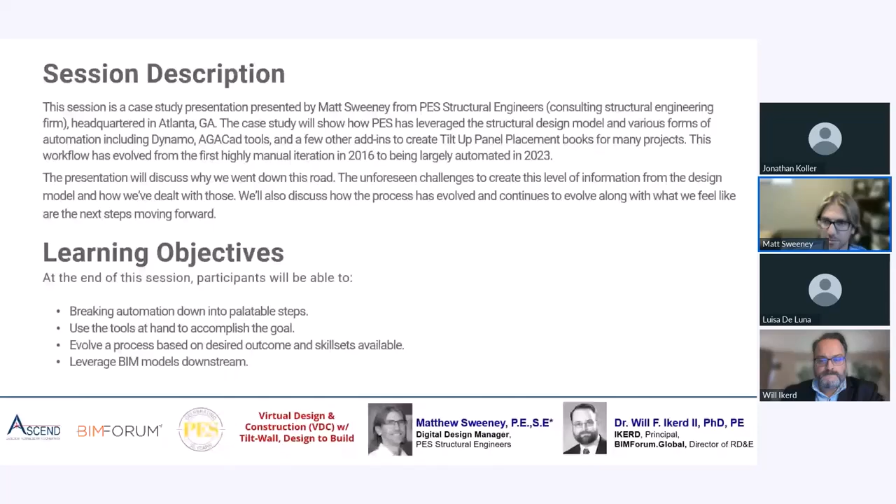So a quick introduction to who I am. I've been in the AEC industry about 20 years now, 15 with PES in 2 different stints, 7 the first time, 8 this time. It's a little picture of me back in 2005, a little bit younger there. Started as a traditional structural engineer, went through all the typical process into project management, the licensed engineer.

Now I've kind of reinvented myself as the overall office technology guy, dabble with some tool creation. But the BIM and technology related direction kind of goes through me. I also work with our IT group on our cybersecurity, CRM tools, all of it. And like Will mentioned, I'm a big outdoor adventure family guy. So PES, we are about 55 people strong.

Consulting, structural engineering, headquartered in the Southeast. We've been around about 35 years. We have 2 offices and some remote folks. Second group's up in Hartford, Connecticut. We work on all kinds of different projects, a lot of warehouse or light industrial, but everything up to and including this larger residential tower on the right.

As a company, we really like to focus on our culture, not just having fun, though we do like that part, but working hard, winning as a team, driving for improvement and owning it. It's also, I think, worth mentioning, we don't have many dedicated BIM staff. Our engineers do a lot of their own work, their own Revit work. We do have a few that get into some things in more detail, but most of it's been engineers.

We've been a relatively forward-thinking company. We started with BIM back in 2006, and looked into and started bringing in automation tools around 2015 or so.

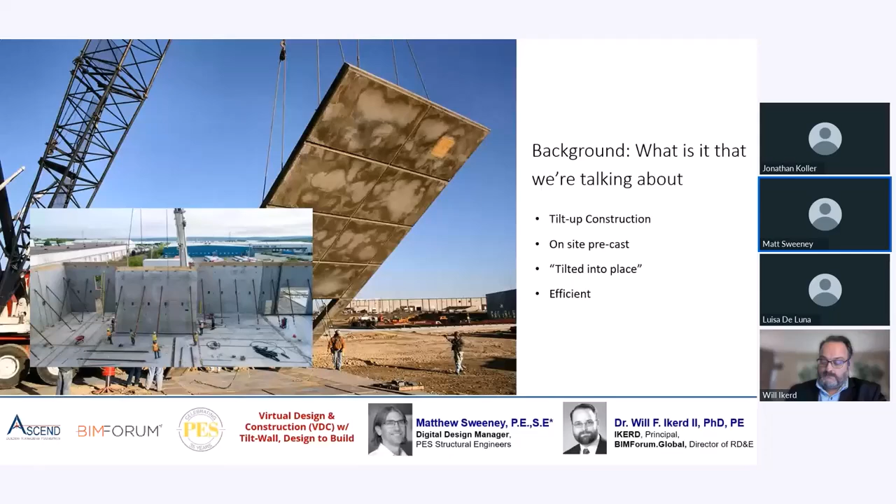So in tilt-up construction, one of the main submittals that we need early on is the panel book or panel placement drawing. It's a shop drawing document used by the contractor to physically lay out the formwork and embeds and anything that goes into the panel for the most part, including size and shape, size and locations of reveals, depressions, openings, embed types and their locations specific on that panel. Basically anything you would need to physically lay this thing out, short of rebar and lifting information. Those 2 pieces tend to come from a separate specialty contractor and are typically in their own packages or documents.

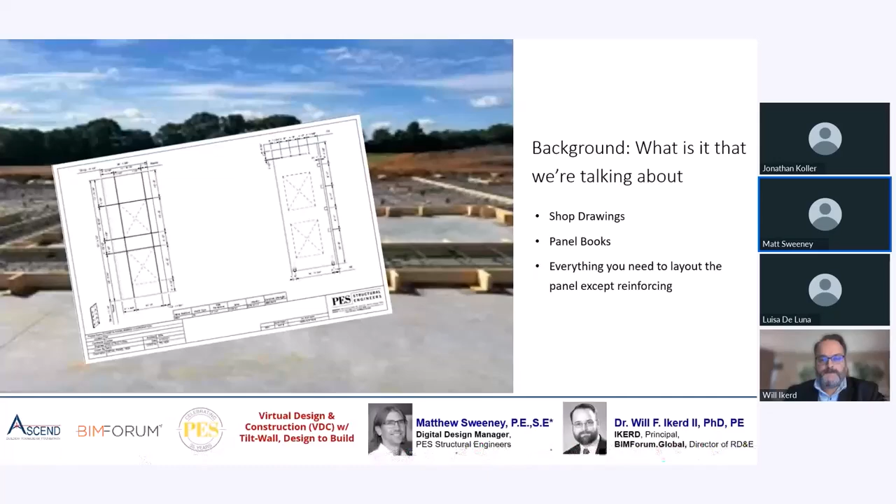Also, getting into schedule timing, we can start development a lot earlier on this stuff because we are ready and familiar with how the schedule is going, what areas can be worked on, what areas should be held, those types of things. And it also helps us forge stronger relationships with some of our clients. We're now providing more service for the project and getting more interaction with them.

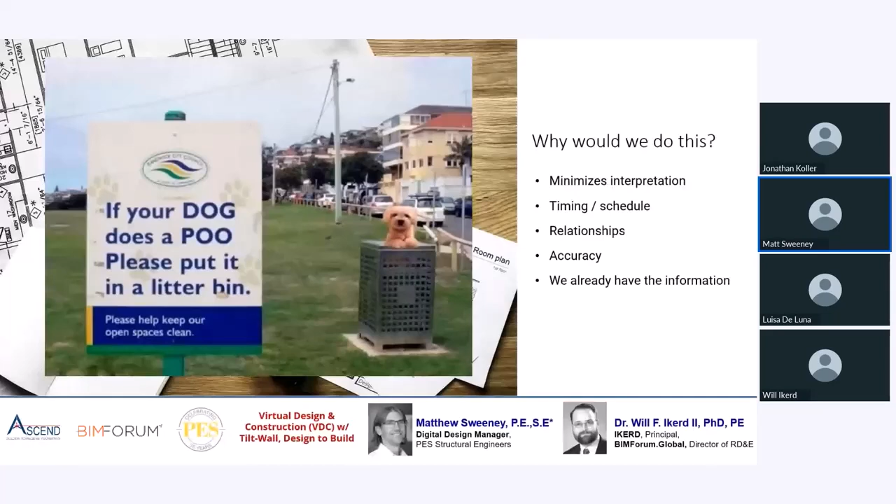So the why seemed to make sense, but how did we actually get going in this, or stick our foot into this door? To be honest, it started with a strong relationship with one of our developers. We had some projects where there were a lot of issues around embed placement and layout. And they sort of looked to us to say, hey guys, what can we do to help? How can we make this better?

So like I said, we're always kind of looking to increase our scope. We've been fairly entrepreneurial as a company over the years. So we had some discussions and decided that we would look at trying to create some of these things on our own.

We didn't go into this with blinders thinking that we were just going to hit go from our models. We understood we make design models. They are not quite the level of development you would need for a shop drawing. So we knew we had some challenges. We didn't have reveals or some of the panel features, some of the joints, those things might have been missing, but we may have overestimated a little bit how well the BIM process was actually working at the time.

Architects maybe not fully modeling all of their information. How was communication going to work? And just the level of coordination you need to get into this detail was just a little bit more and different than design work. But we had some thoughts.

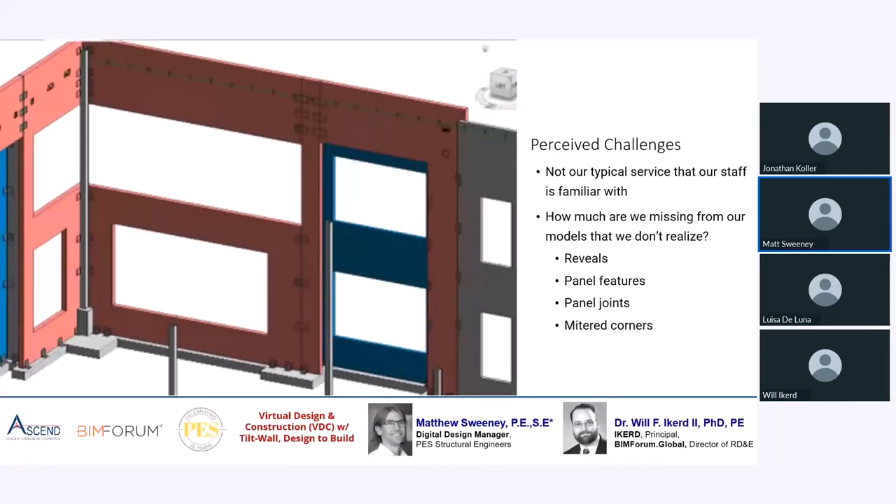So some of the things that we originally thought, and this is kind of where we started, is that we thought maybe we would save ourselves some headache by minimizing sheet count. I'll touch on that a little bit. We knew we were really going to have to detail processes out. This is not our bread and butter work, something we do all the time. We were going to have pretty detailed processes. We were going to make sure we leverage some of the construction tools in our platform that we don't normally get into.

We had a pretty robust intern program at the time. We knew there was some repetitive work, so we could leverage that a little bit. And then automation was something that from the beginning we knew we needed to get into and bring into this process. But when we started this in 2016, we were just learning some of the automation tools. We had some very basic coding knowledge, but we felt pretty good about it.

So the first attempt didn't quite go as planned. It wasn't really a lot of fun. It was complex. Some of the places that we thought were going to be easy were not. There's a lot of view making, a lot of sheet making, dimensioning. Just by the time we got through it, we realized we needed to make a change, and then had to go back and redo a lot of things. We didn't do so well from a profitability standpoint on that first one, and we certainly weren't going to get a lot of volunteers from the office to work on this process if we didn't make some adjustments.

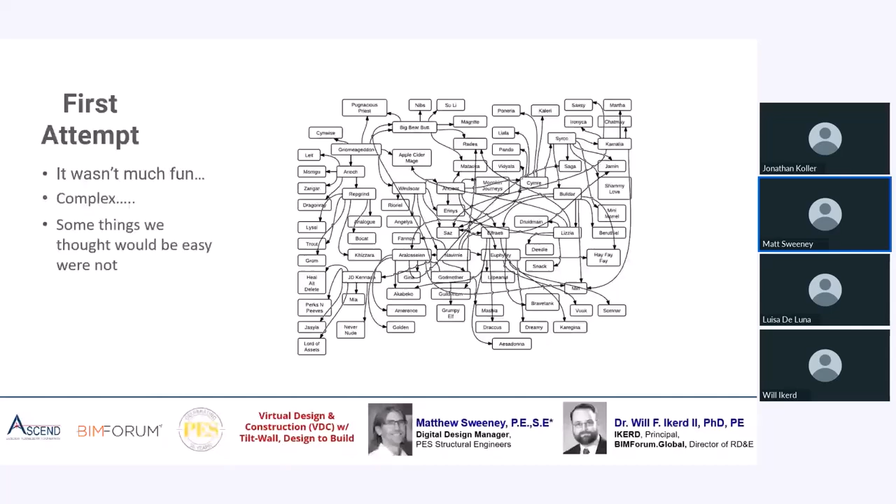So we started looking at refining this, and we tried to be methodical about this. We broke down the steps, made some tables with solutions, put it into 2 big buckets, and then asked ourselves some questions like, what things were the most achievable? Where would we save the most time? What was the most egregious to the actual end users? What steps had application in our typical workflows and typical processes? Not all these answers aligned with each other and made it obvious, but they gave us a good framework to get moving with.

So our lowest hanging fruit honestly seemed to be we absolutely had to improve the LOD, or level of development. Shop drawings, like I said, are quite a bit more. Our design models are closer to LOD 200, where shop drawings are going to be in the 350 range. So we needed to get some detail into our model.

The automation of getting embed plates seemed like it was a good place to start. We have walls, we have intersecting joists. Most of your primary embeds are going to happen at some sort of intersection of a wall and another member, be it a joist or a joist girder or a roof of some sort. So we turned to Dynamo, intersected the face of the wall with the joist, got ourselves a point and dropped in a family at that location. For the most part, it was pretty straightforward.

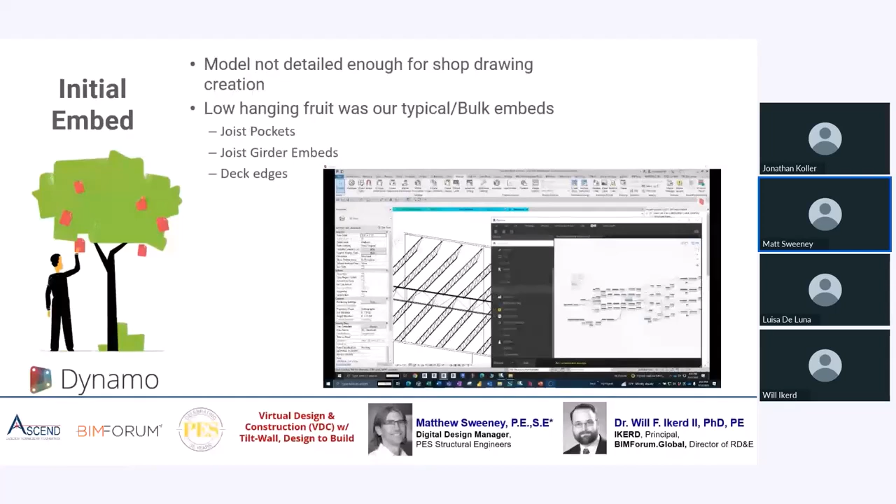So we went from there into panel joints, and these are often overlooked. Design models don't show some of the construction tolerance, the gaps between the panels or the gap at the bottom for the grout bed. There's a couple ways you can consider doing this. You could physically shorten the walls, but that had implications on how the footings worked, and we wanted to be able to go from center line to center line, so that wasn't quite what we wanted to do.

But we went the approach of just putting in full depth reveals at each end of the wall to create that gap. We assumed and thought this was going to be really straightforward, and we felt really good about our automation abilities. We were wrong. Dynamo didn't quite play as nicely as we wanted it to. It would only place one of them.

But what we did learn is that we found some macros that access the API a little bit differently and allowed us to get most of them modeled relatively well and relatively close to what we needed. We did need a few manual changes here and there, but it was well over that 80% rule. So again, a big step forward in getting this done without all the manual work. Maybe not perfect, but again, we're trying to take steps forward in the process.

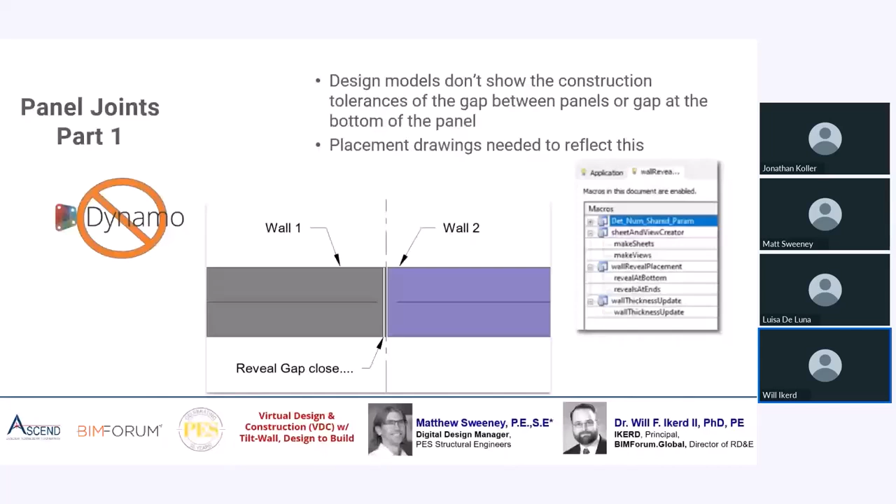And Matt, I had one question in this area. We've seen a lot of examples in precast, but there you have a much more controlled manufacturing environment when you get to the casting beds. With tilt wall, you're on site. I guess it is assumed we've got a lot of manual layout in the field. On most of your examples, are they basically working off paper in the field on these embed layouts when they're setting them in the formwork?

Yes, they are almost always working off of paper, and I'll mention that in the next couple slides. But they get to where they want one piece of paper for each panel, and they can basically set that out at the base of the panel, and then everyone can reference that. And that's how they prefer it at the moment. So it's interesting how that works, though. Definitely.

Moving into the next piece of the model here, though, is the reveals. As structural engineers, we don't get into this that often. We don't model these. Once we know the depth, we can design our panels around that depth. We look at them to make sure nothing crazy is going on, but we don't have to deal with the specifics of them. For the shop drawings, they need to be accurate. They need to be dimensioned, tagged and all there. So we initially just went with the idea that we have the architectural link. We can turn that on, dimension them, and go from there.

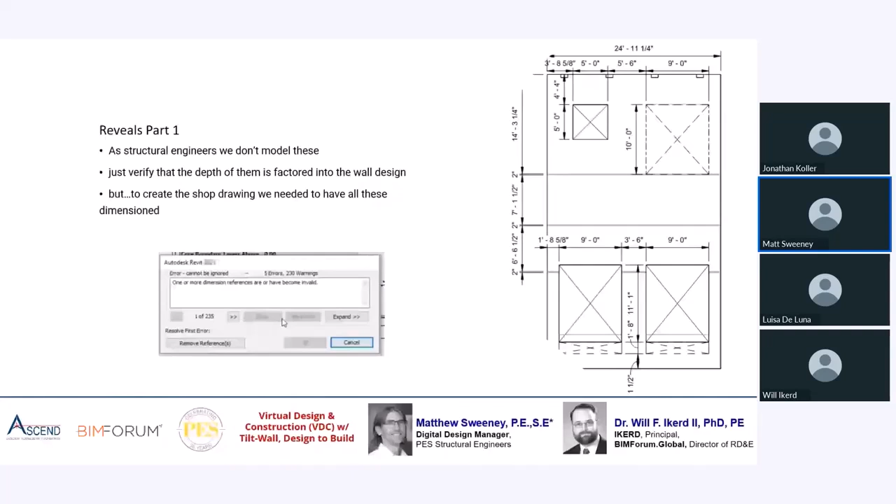On the way, we realized and found out that wall orientation had a large impact on any sort of automation you wanted to do. And most of our team is pretty good about modeling very consistently, but sometimes you're modeling or copying from architectural walls, or you're copying walls around, and this just gets missed. So we made a few different graphs to help us get everything in line.

And we really stuck to the keep it simple approach with this one. We actually made 4 different graphs so that it was very approachable for anybody in the company to use. You didn't have to wonder what was happening or do anything weird. You could just pick the walls you wanted to face one direction. We put that into Dynamo Player, so it was very simple for everyone to use.

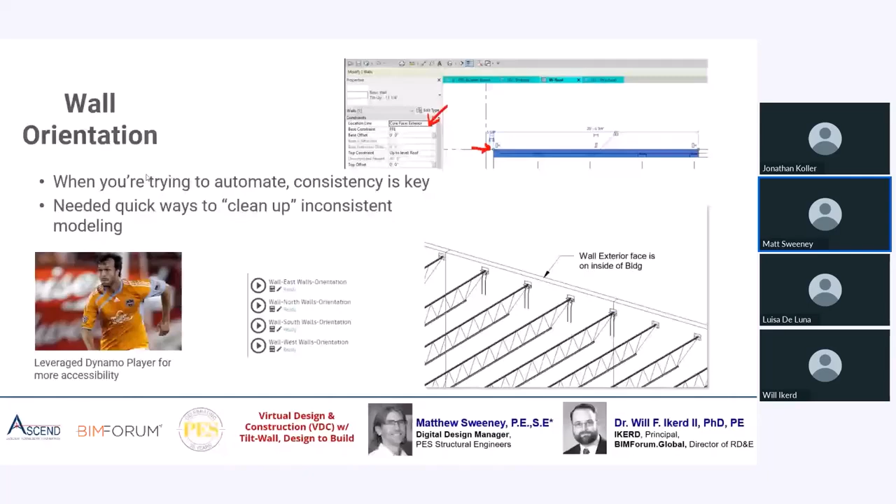So once you get the model where you want, you know, you think you've made good progress, you get into the views and the sheets and the documentation, and that's where the fun part really begins. And this is really where your automation can save the day. The first one we did was largely manual, and when I say largely manual, we really had almost no automation. So we did most of this by hand.

And like I said, we tried this idea that less sheets was going to be less work. That's incorrect. Less sheets actually becomes more work because you've got to try and squeeze them into these little blocks. And it's not really what they want in the field anyway. They really want one sheet per panel because it just makes it cleaner for them. They can basically staple it to the formwork almost, and then everyone has that sheet to reference. They don't want this grouping of panels.

But we got into the view creation. Each panel has two different views associated with it, a reveal view and an embed view to keep your dimensions somewhat clean. The first time this was creating an elevation, copying it around the building, using an add-in to duplicate that, then renaming and view templates. It was very manual, very haphazard, to be honest.

Nothing was identical. Trying to automate anything really became a challenge because it was so bespoke. And then you had to get into creating sheets. So at the end of the day, this got really, really cumbersome. Some of these buildings have over 190 panels. So we really had to get into doing something with this.

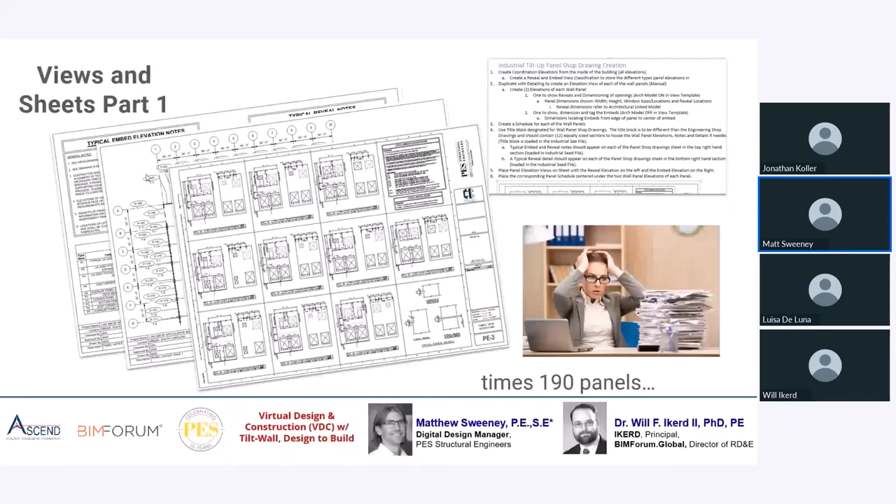We transitioned this into more Dynamo to create sheets, create views for each panel. That created each one of our views. It also made sure that they were created with intentionality. They were consistent. They all had the same gap on the end of each wall. They all had the same view depth. Everything was the same, which meant we could easily make edits along the way. We knew what we were dealing with.

Cropping issues, we had filters created from that same setup that filtered out the panels next to it. There were still some challenges, but this was pretty big for us. The bigger task, though, was making the sheets. We actually turned to a couple pretty basic add-ins for this, using ArchSmarter to make different sheets from an Excel sheet that basically puts all of the views on the sheet, and then we could turn back to it to align the views. So now we had all of our sheets and views created with a few different steps.

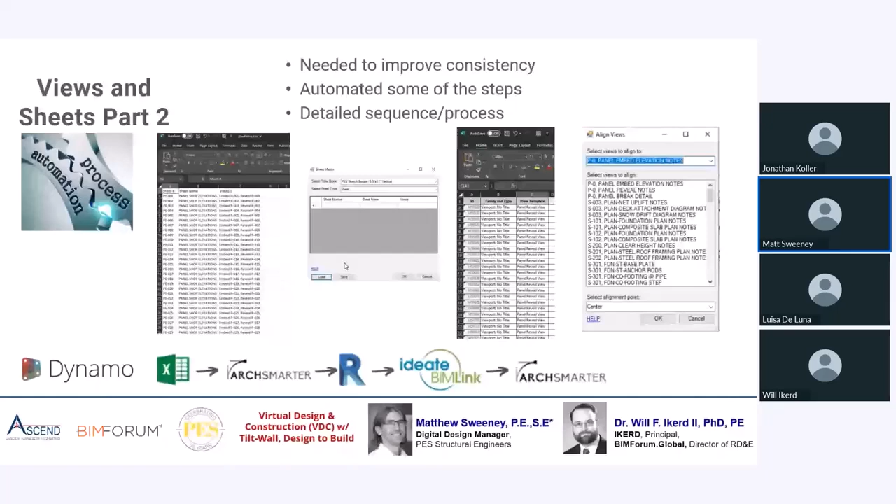The tools and steps are adding up, but it's a scalable process at this point, as opposed to just how much clicking can you do. Now we're starting to get into this scalable process. We still needed to add our schedules to the sheets and create the schedules. So we stuck with our keeping it simple. We went and made a few more different graphs to put those together, put them on sheets, and keeping things as their own step in their own graph made them easy to troubleshoot. It made it easier to teach people what was going on, because you really did have a step-by-step process.

And again, these steps are adding up, but it is kind of a scalable process. And with that engaged team, it was almost starting to become fun, and there were reasons and discussions, like it was almost like a game to try and find out what next step we could do to make it cleaner and easier for us.

We were making really good progress with this, but then we got into dimensioning and tagging, and there's a lot of dimensions and tags. They really have to be accurate. If you do this manually, you bring in some opportunity for human error with picking the wrong reference plane or just skipping and missing things. So we really knew and wanted to make some automation happen.

We were starting to see more of this come in. Things were starting to pick up, and we needed to make some progress quickly.

We'd been in this for a few years now. Developing those tools on our own became a challenge. With Revit changes, API changes, which means you had to update the Dynamo tools, the macros. Trying to keep up with that on our own was tough.

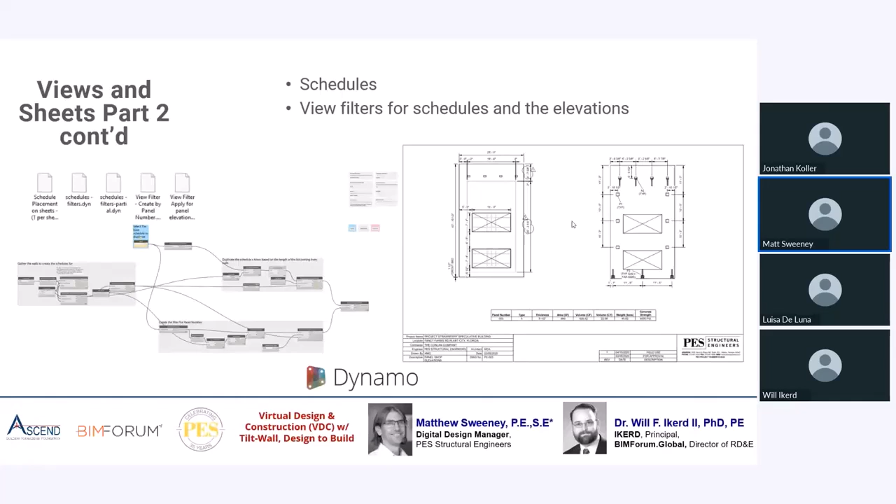We came across a tool from AGACad that looked like there were some promises actually geared towards precast. It was a little different than what we were doing. As Will mentioned earlier, it's a lot more controlled, but the end goal was actually quite similar. We did a number of demonstrations and trials and testing, and found that we could use it as a platform to get to where we wanted to go.

And definitely not a commercial here. This is not an easy button, but it was a platform that gave us the ability to kind of leverage what we had done already and take it further.

Even though our main focus with this tool was dimensioning, we realized there were a lot of opportunities to improve our modeling. So we actually jumped on that first and streamlined how we were placing our embeds and our panel joints and gaps and everything along those lines, even the reveals. There were tools for rule-based placement of any sort of face-based families, so we had a lot of options to make this go quicker.

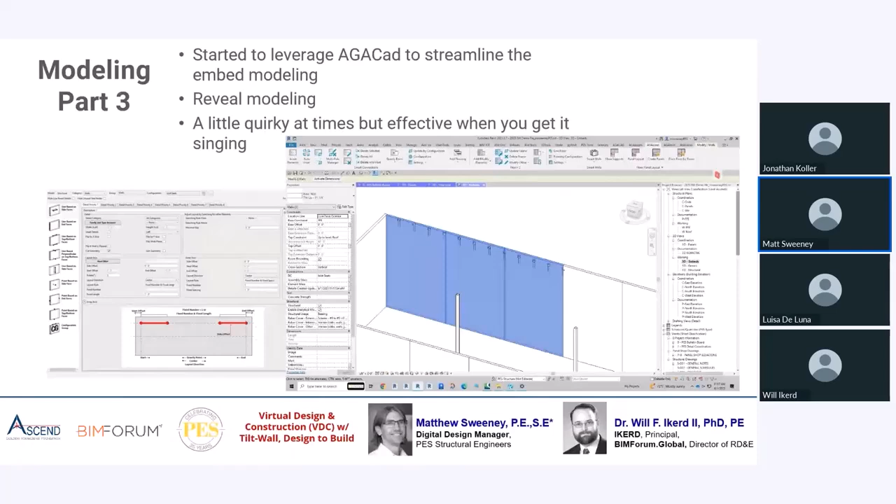So the biggest game changer here was really getting into the documentation piece of this, and that's kind of what led us down this road, was getting all of these pieces of view creation, sheet layout, dimensioning and tagging, kind of bringing it all into one large template in one tool, albeit it's a very complex tool with a lot of different pieces. And at the end of the day, it really is leveraging some of the built-in pieces to Revit, but it really makes everything a lot more approachable.

We had investigated a lot of the out-of-the-box tools and didn't have a lot of success getting them to where we wanted them, just with too much user input, and this really kind of gave us that platform to put it all together.

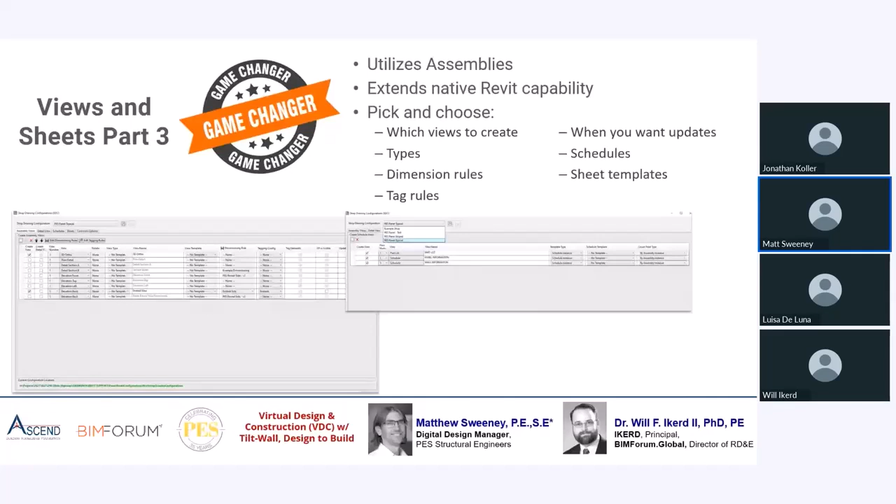So we have the ability now to put in templates for our view creation and sheet creation, so everything gets to where it wants to be. But ultimately, the dimensioning and tagging are really the key parts to this, and there's a lot of tools around getting these set up the way you want. The biggest key is that now you've defined what family you want and what reference planes in the family you want to tag, and you get that exactly correct every single time. It works really cleanly at that point.

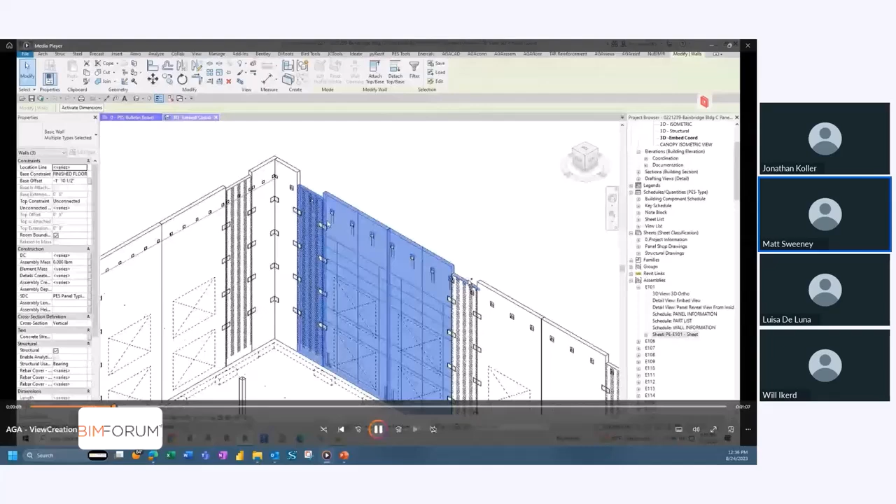Just to demonstrate that quickly here, if you select a few different panels, these all have everything they need in them. This is real similar to what we saw with putting in the embeds. You pick on that, and you can actually go look at your templates if you want, which views you're creating, which schedules you want to create. As we look at this, I see you've got the panel selected, and then you pull this dialog up, and it gives you a lot of granularity.

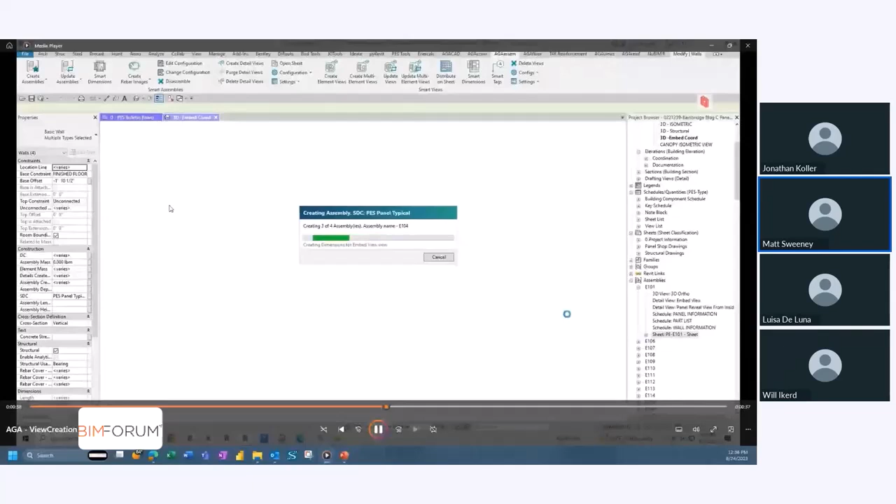And this is the third-party plugin you're using? Correct. Okay. And then we get those sheets, and now I've made sheets, and you can see all my dimensions are in here. At the scale we work at for these, there is still some cleanup. This is getting better with every update, but we will go in and clean a lot of this up so that it's a lot more legible.

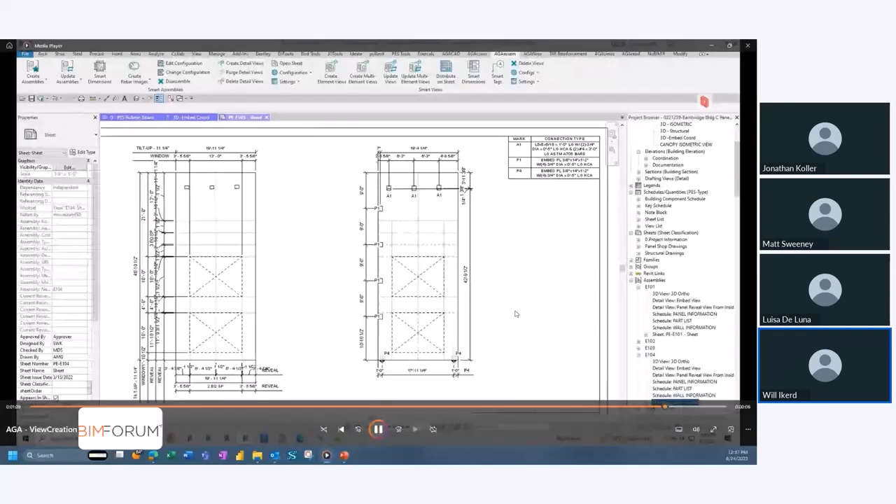But you can see that it becomes a very repeatable thing, and this is where it really kind of changes things up at that point. And so we're getting the front and the back, and these are essentially, I guess, an ANSI B 11 by 17 sheet. Correct. Okay. Front, back, 11 by 17.

Every sheet, every wall is on its own sheet, with a list of which embeds are which, exactly where they are from the edge of the panel. They're both from the outside or inside out, because they're going to form these face down, so that when you pick up that sheet in the field, you're looking and standing at the base of the panel, looking out over the formwork.

So one thing that comes to mind is nesting and quantification of your embeds. I see you've got your marks and your bill of materials in the upper right. Were you able to automate a lot of your embeds for quantity takeoff? At this point, you can actually double check this against your steel submittals to get your exact number of embeds, because you've got all of those quantified here. So you take those numbers and match them up against your steel submittal, which is nice to verify and double check.

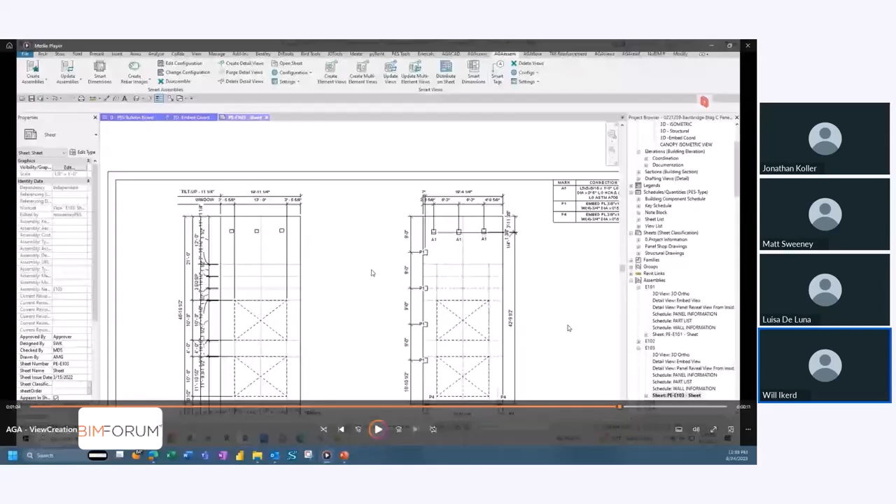One thing that comes up, Matt, is you've got your bar joists, and those are going to be from your joist manufacturer, and they have a steel detailer. Then you may very well, on the opposing orthogonal directions, have some structural steel beams that connect in. If you're not using a trussed girder type system, you might have some traditional structural steel for columns and maybe a few girders, and that's another steel detailer working under the structural steel fabricator. When we're looking at those, perhaps you might have canopies outside the building that could be miscellaneous metals, so you might have yet a third detailer working under a fabricator. So even when we say steel on one job, you may have three steel detailers from three separate firms.

In theory, one could be, I'm not plugging any of it, but one could be in Tekla, one could be in SDS2, and another could be Advance Steel. Each of those have to have an embed to do their part. Has anyone ever really asked you for a DXF or a 3D CAD export of just your embeds as a reference? Or are any of the GCs you're working with looking at that level of coordination?

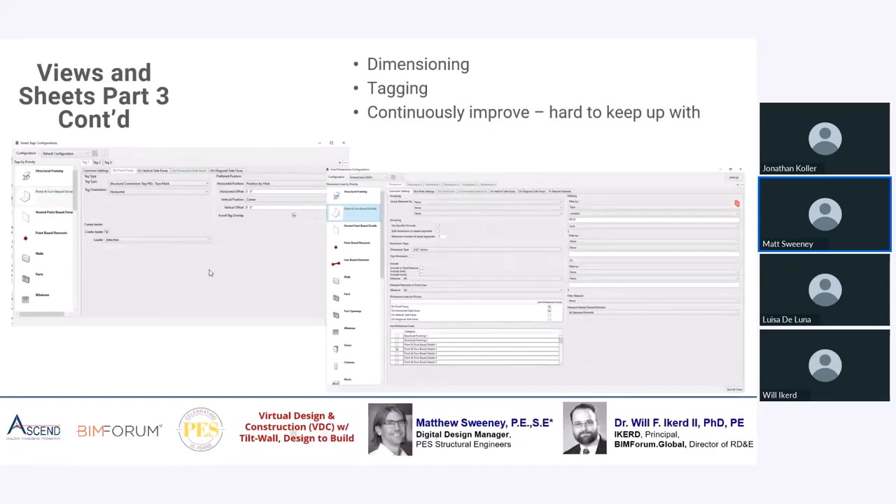Which leads me into progress here. How's it going with this? To date, we've done 16. Actually, since I finished this, we've done another one. So 17 of these projects.

These have been up and down the East Coast with a few different contractors and project teams, both internally and externally, with minor differences. One thing we really try to make sure we do before the set even leaves our office for the first time is a quick cursory review by the design team to try and catch things before they even leave. The way we approach this service in-house is that we have a separate team do the panel embeds from the design team, because we want to keep that separation.

They are familiar with how our company works and how we detail things, but they are not the same team who did the design, and we think that has benefit to the overall project. But we do try to make sure the design team gets to look through it quickly. They're still going to do their own review, but they can check that it's generally in line with what they'd expect to see before it even goes to the contractor for initial review and approval.

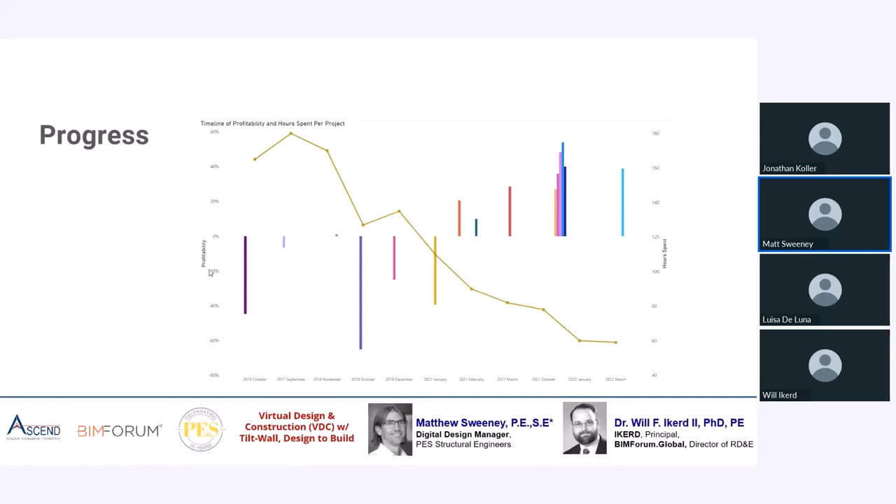Because this is a very popular structural vocabulary, if you will, for buildings, data centers, distribution centers, big box retailers in a lot of markets. And without going into a lot of details, there's a certain conventional wisdom of how many dollars there are per panel. As far as just 2D panel book creation, it's almost a commodity.

But the real differentiation here is you've created a framework that can facilitate some very detailed coordination between something that's typically notorious for the general contractor to miss. So without getting into dollar amounts, are y'all approaching being cost competitive in your markets with 2D panel book providers? I mean, these are sometimes just a single operator working with 2D CAD who's been doing it for 20 years, and they can sit at their house and bang out a lot of panel book sheets really quickly.